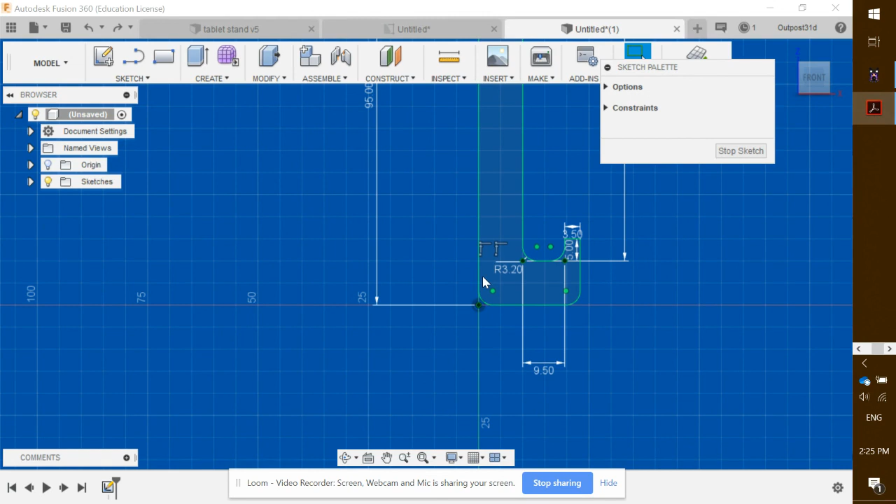Okay, welcome back. We're going to be working on creating the holes that our pegs will go through. You can see, just by looking, the holes are right here and right here.

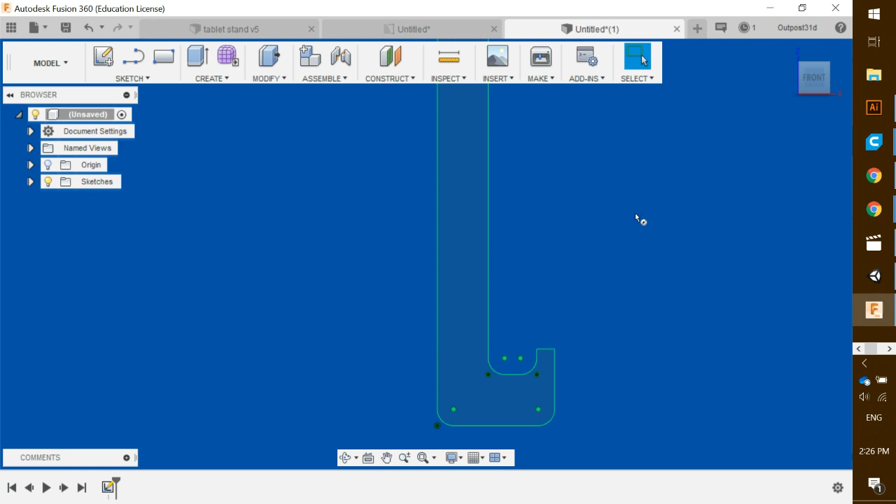Going back to our design, I'll click Stop Sketch for a clearer look at what we're making. Then I'll tap C for the circle tool, click on the ZX plane, and start sketching. I'll zoom in a bit, and it doesn't have to be exact. I'll put it right here and drag out, making the diameter of our circle 6.5 millimeters. I'll hit enter, and there is our circle now.

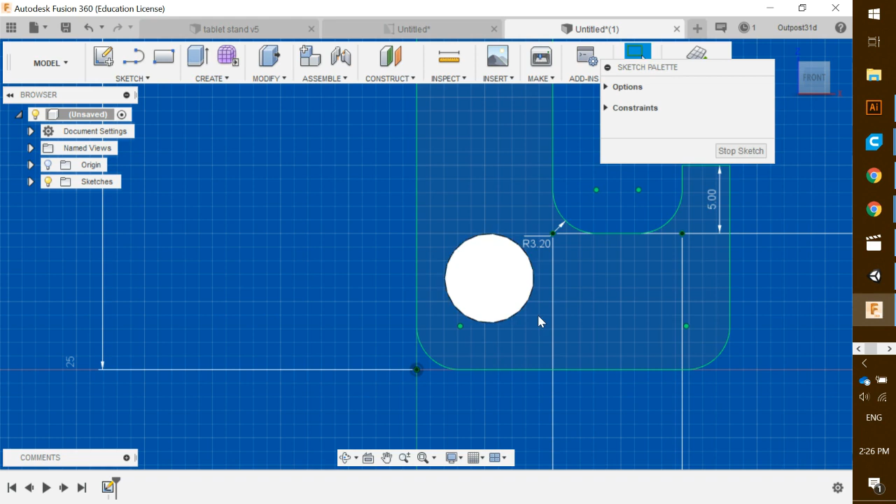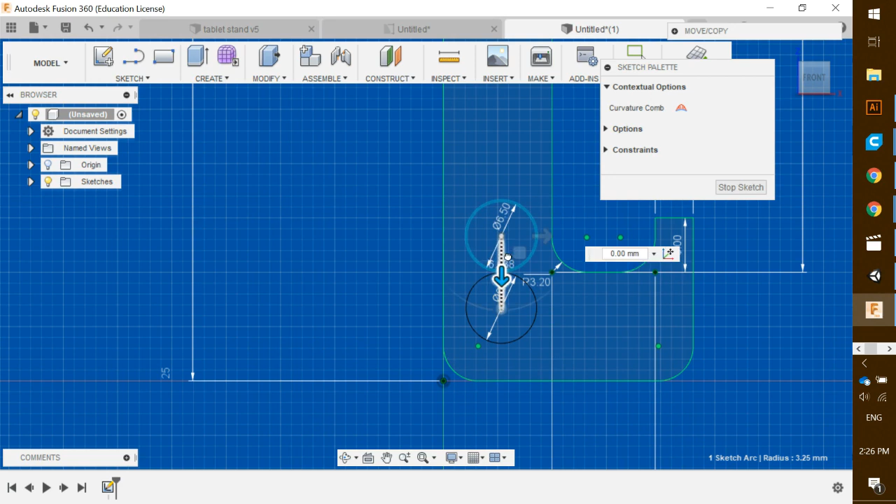I'm going to copy this circle and put one up on the top, because if you look at our model, there's one a bit higher up here. So I'll tap the circle, hit Control C and then Control V to make a copy. Then I'll use this arrow and bring it all the way up to about here. It doesn't have to be exact, I'm just kind of guessing. Then I'll click Stop Sketch. So there we go, we have our two circles now.

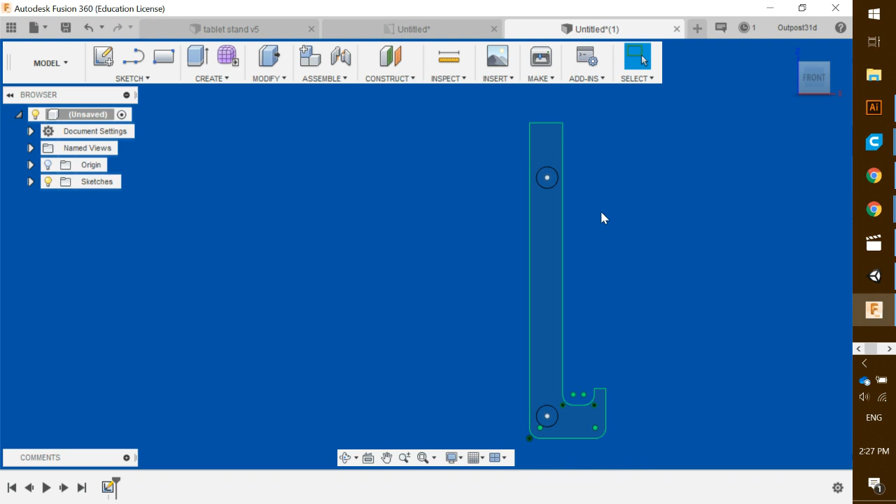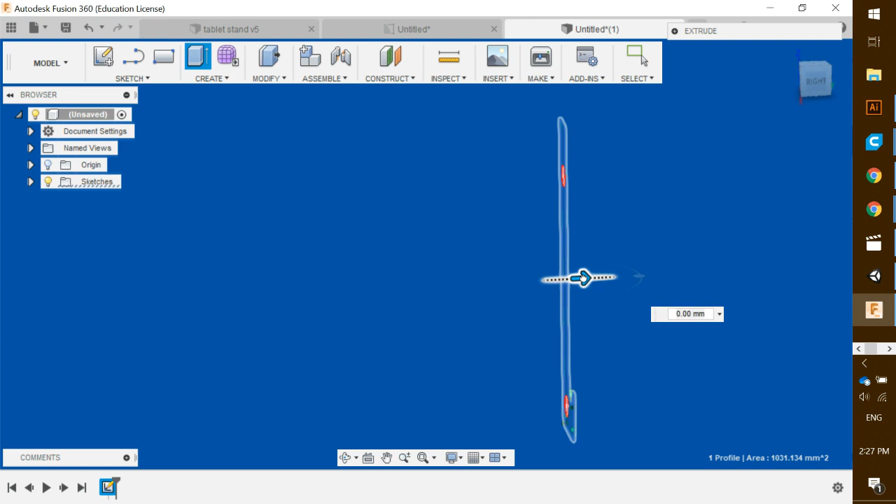Now the next thing we're going to do is extrude our model. To do that, we tap E on our keyboard, tap once here, and it asks which direction we want to extrude in. I'm going to pull this way and make it 6 millimeters, hit enter once. You can see it's extruded 6 millimeters and made this kind of piece that looks like this.

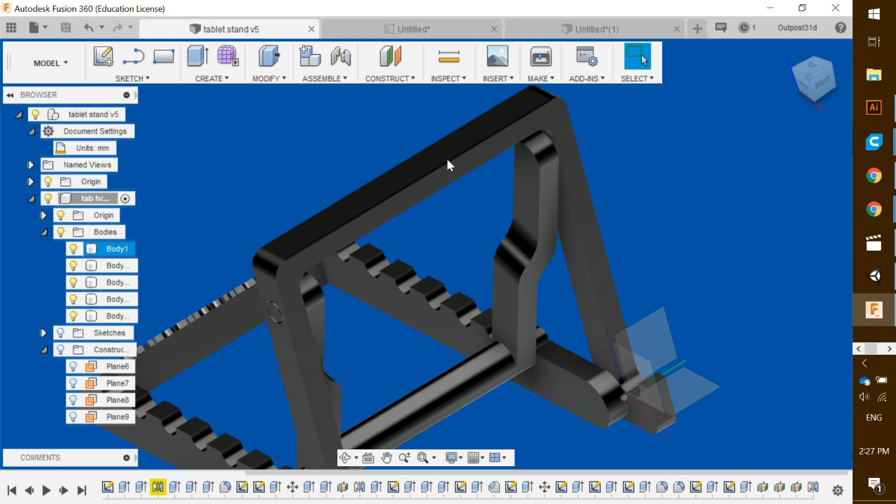Next, if you click back on our tablet, you can see there's this crossbar piece that comes across up here. We built this piece that comes up like that, and we want to build this crossbar piece that comes across the top. So I'll put a rectangle right here on the end. I'll rotate it sideways, click on back, and up on top I'm going to place a rectangle using the 2-point rectangle tool.

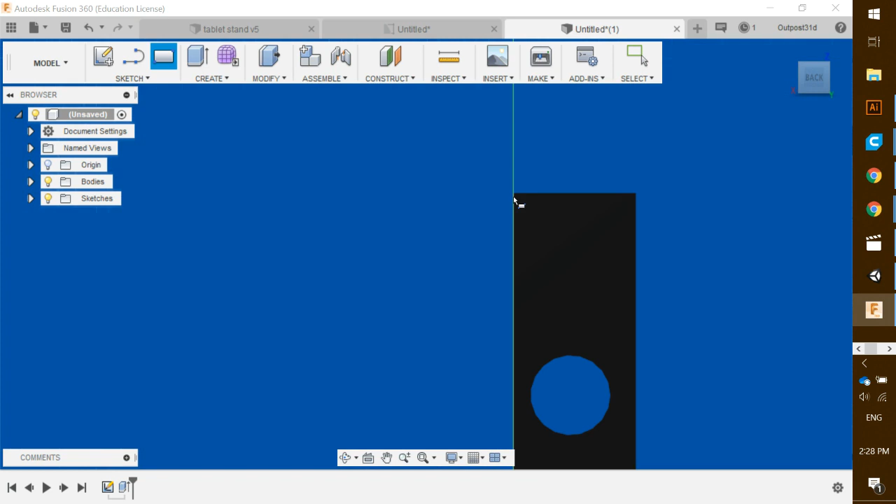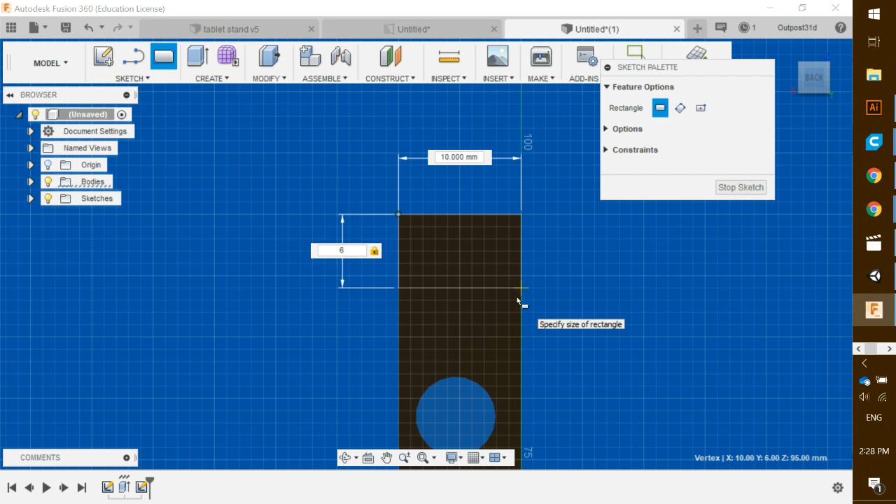I'm going to zoom in a little bit, click on here once, then come up to the corner and see how it goes square there. I'll click on that and make myself a rectangle. Now I'm going to make the rectangle 6 millimeters, and of course the length is 10 millimeters. I'll hit enter, so there's my rectangle right there.

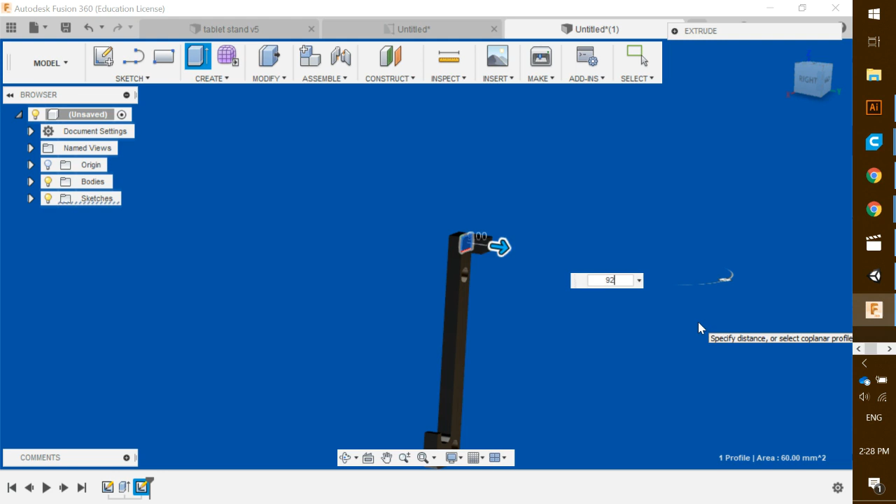Now I want to extrude this rectangle out, to bring it across. So I'll tap E on my keyboard again, tap the rectangle, and pull this out. The length of this is kind of up to us, we can do whatever we want. I'm going to put it at 92 millimeters for now, and hit enter. So you can see now we have this crossbar coming across the top.

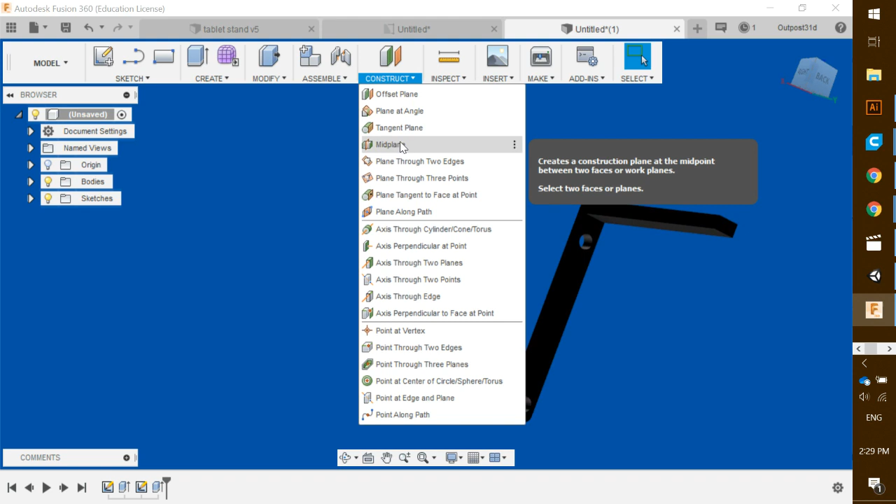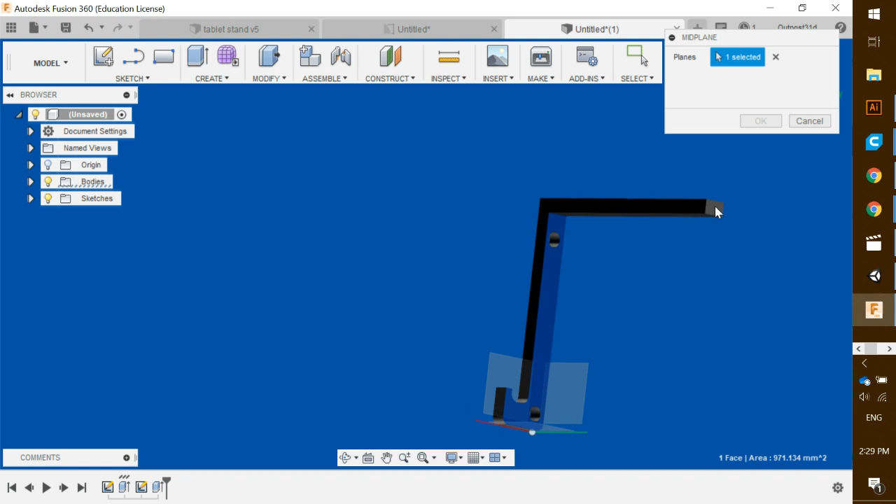Basically what we want to do now is replicate this side and put it over on this piece here, which we've done before. To do that, we go up to Construct and tap on Midplane. It gives a little bar that says Mid Plane, and if I click the plus button, it asks what planes I want to choose. I'll select this inner plane, then that plane right there, and it puts a mid plane in between those two. So we've got that mid plane, chosen from this inner plane and that plane right there. I click OK, and it says 2 selected.

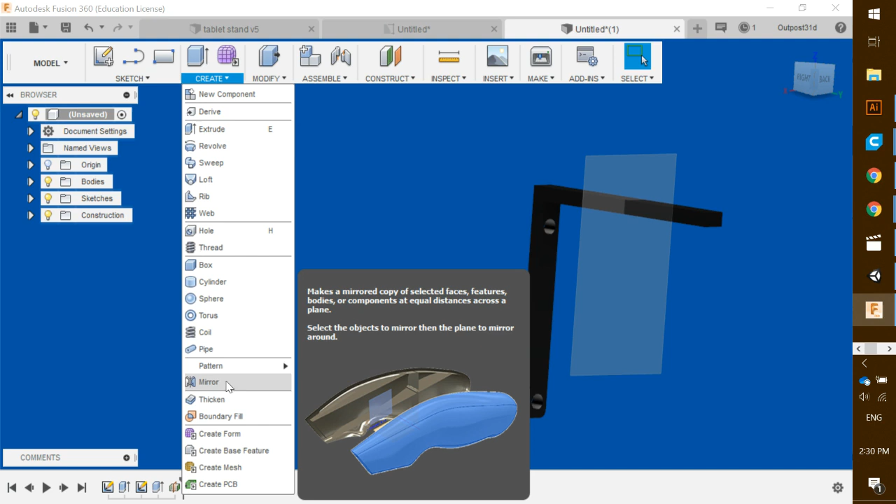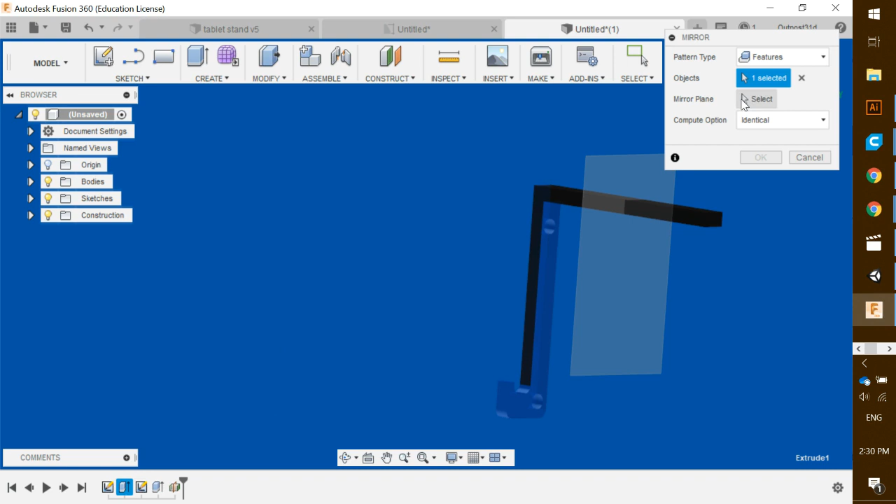Once I've got my mid plane ready to go, I'm going to mirror this. I'll go over to Create, then Mirror, down here where it says Pattern Type. I'm going to mirror features, and the features I'll mirror are these extrusions. I'll click that extrusion, just this one, because I only want to mirror this part, not the cross piece. So I click that one on my timeline. It asks me to select the mirror plane, I select it, and you can see it recreates that piece on the end. Just taking a second, and bang, we've got an exact mirror right on the end.

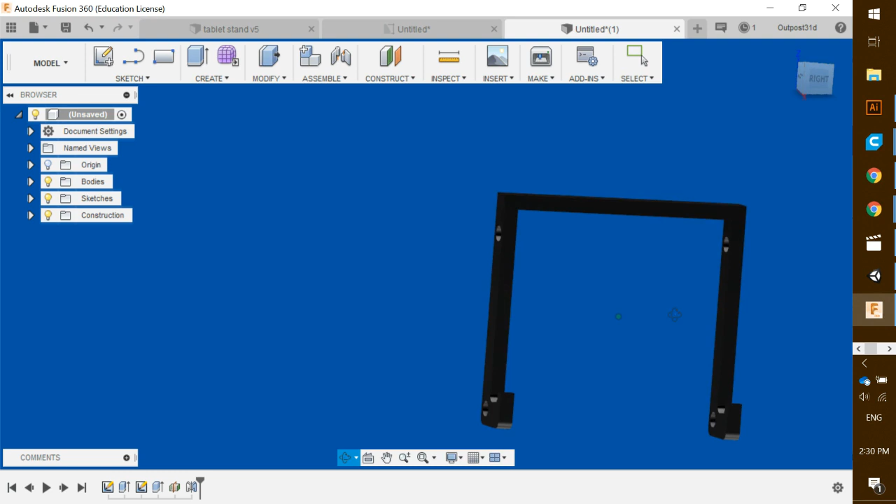Now, if you don't want this mid plane shown in the middle anymore, you just tap it, click V on your keyboard, and tap away, and it will hide that line. I think that's under your construction lines here, right there, yep, see, it's right there. So you can toggle it on and off under construction. Okay, good, we've got this done. In the next piece, we're going to be working on the bottom section of our holder.